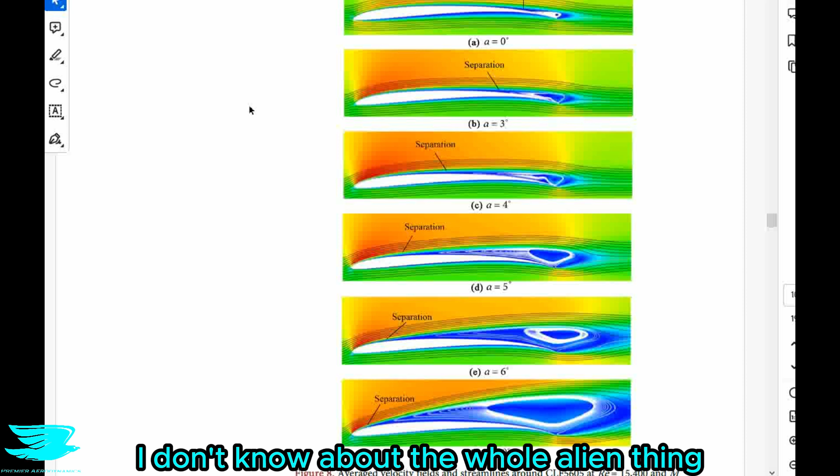The Mars helicopter Ingenuity was the first helicopter ever to not only fly around Mars, but also anywhere other than Earth. At least it was the first human-created aircraft. I don't know about the whole alien thing, but let's not get into that. The Mars Ingenuity is a helicopter that has been flying around on Mars for a few years, and it is unique in a few ways.

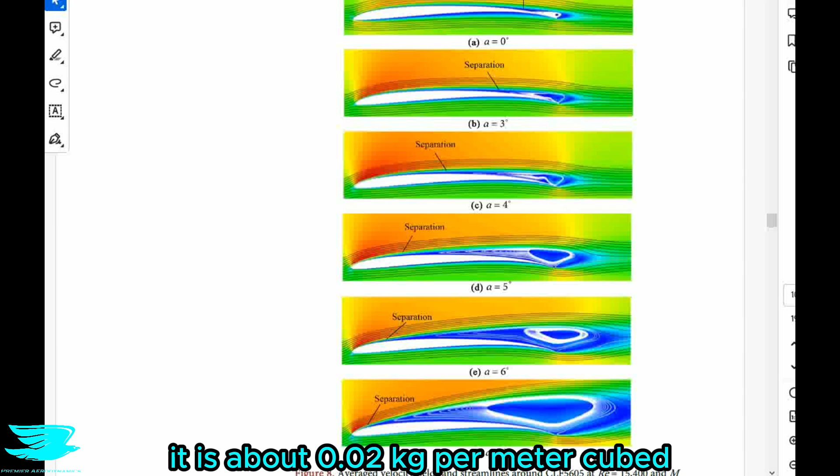The first way is that it is the first extraterrestrial aircraft to fly around. The second is that it operates in a very low density atmosphere. Because Mars' atmosphere is very thin, it is about 0.02 kilograms per meter cubed, which is 1/60th of Earth's. Now, with an atmosphere that thin, it results in a unique condition where you have these very low Reynolds numbers and compressible flows at the same time around these helicopter blades. Usually, compressible flows occur at higher Reynolds numbers.

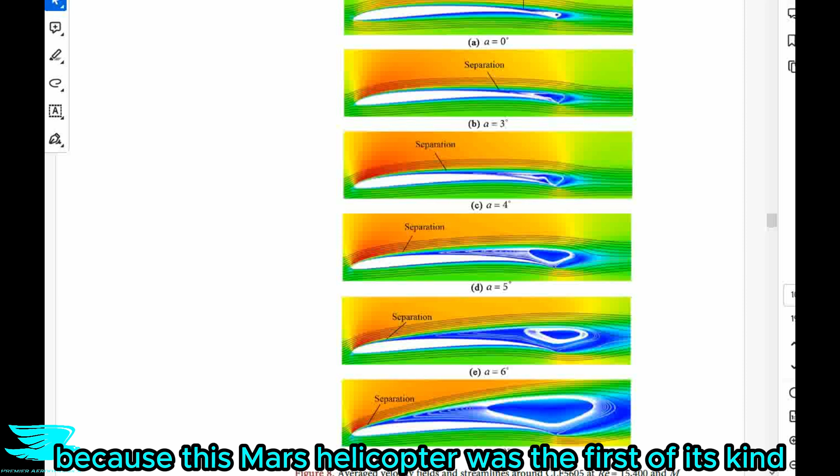So it is unclear how shockwaves form and their effects on the aircraft at such low densities. What's more, because this Mars helicopter was the first of its kind, its performance obviously won't be nearly as good as what we can make it, because we simply don't know how these low density shockwaves and general compressibility effects will affect the aerodynamics of the helicopter. As such, learning about these aspects will enable us to make far better helicopters for Mars and other planets too. For example, new aircraft will have better payloads or greater ranges or even higher speeds. Who knows, maybe even drag racing on Mars will be a thing in the future.

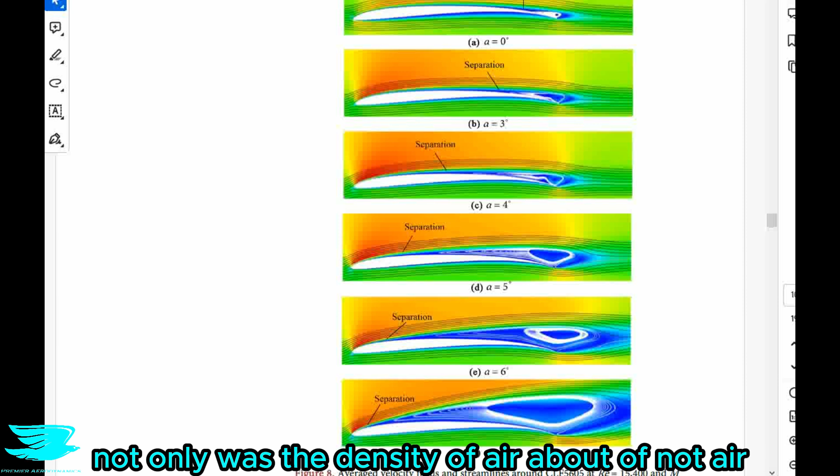Now, just to give you an idea about the conditions of Mars the helicopter had to face, not only was the density of air about 1/60th of Earth's, but the temperature was on average 223 Kelvin, so 50 degrees lower than freezing. And the speed of sound on Mars is only about 70% of that on Earth, because the atmosphere is mostly CO2 and is also much cooler. Also, the atmosphere's pressure is only 720 pascals compared to Earth's 101,000, so less than 1% of Earth's.

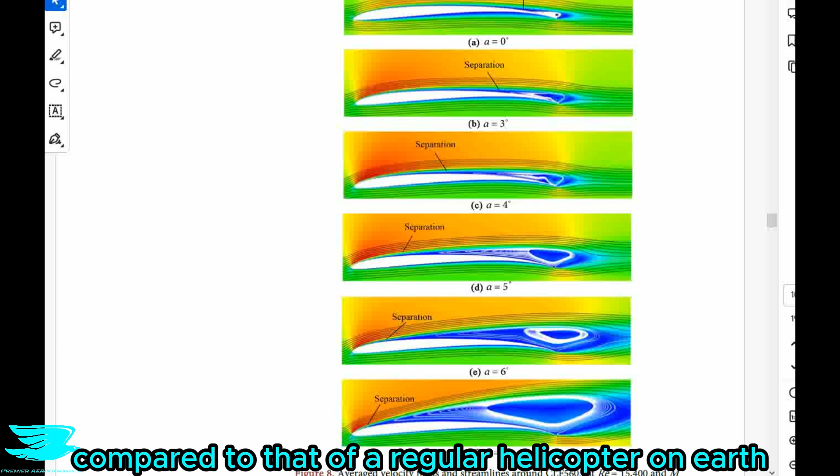As a result of all of that, the helicopter's rotor blades were only operating at a Reynolds number between about 1,000 and 10,000, comparing to that of a regular helicopter on Earth, where the blades are operating at a Reynolds number of about 1 million or even greater, so 1,000 times greater than that on Mars.

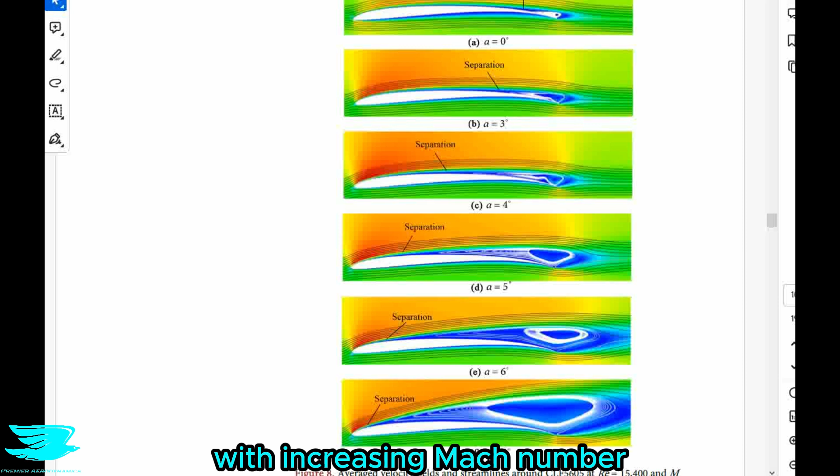So some studies on such low Reynolds number compressible flows reported that the wake becomes elongated and is delayed more. What's more, the lift coefficient can decrease with increasing Mach number. The study that reported that finding said that for their particular airfoil, the lift coefficient dropped because the compressibility effect delayed the transition to turbulence, and hence the laminar separation bubble that would form usually, it didn't form, and hence the lift coefficient dropped.

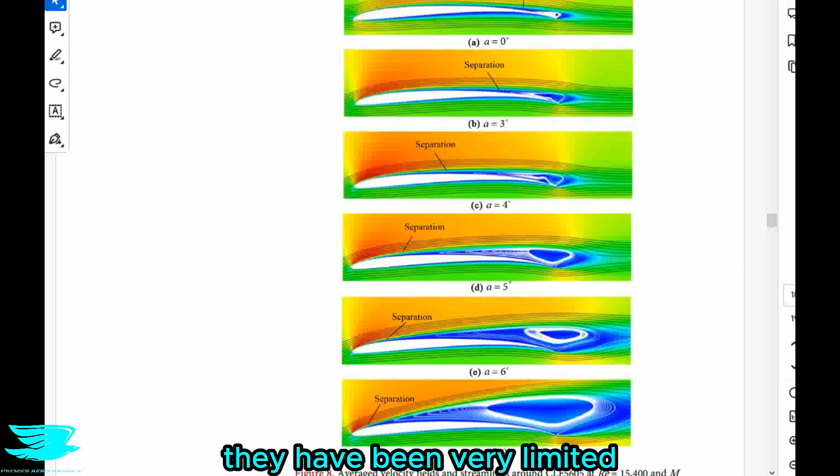Now, while other studies have shown some funky effects, they have been very limited to Mach numbers below 0.8. So the strange effects we are seeing here were found at relatively low Mach numbers and not even sonic speeds yet, which the helicopter on Mars is actually experiencing.

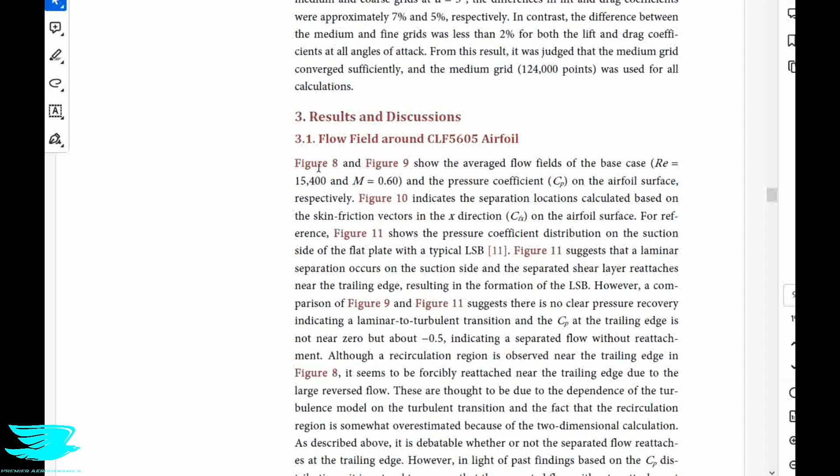So as a result, today we're looking at the effects of transonic speeds at these low Reynolds numbers on the Mars helicopter's blade profile. To do that, we're looking at a paper called Numerical Study on Low Reynolds Number Compressible Flows around Mars Helicopter Rotor Blade Airfoil. This is open access, so you can find it in the link below.

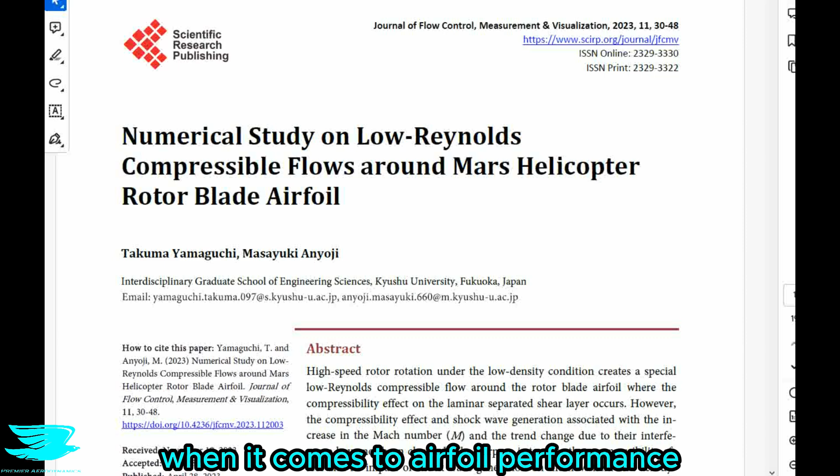Now, just a little more reason as to why the Reynolds number is so important here when it comes to airfoil performance. In figure 2, we see the effects of the Reynolds number on the maximum lift-to-drag ratio of an airfoil in general terms. We see that for the laminar boundary layer, this region of the plot here, the maximum lift-to-drag ratio is far lower than when you have a turbulent boundary layer. And then when you transition from laminar to turbulence, there's this massive peak. It spikes up to a much higher value, and then you go to turbulence.

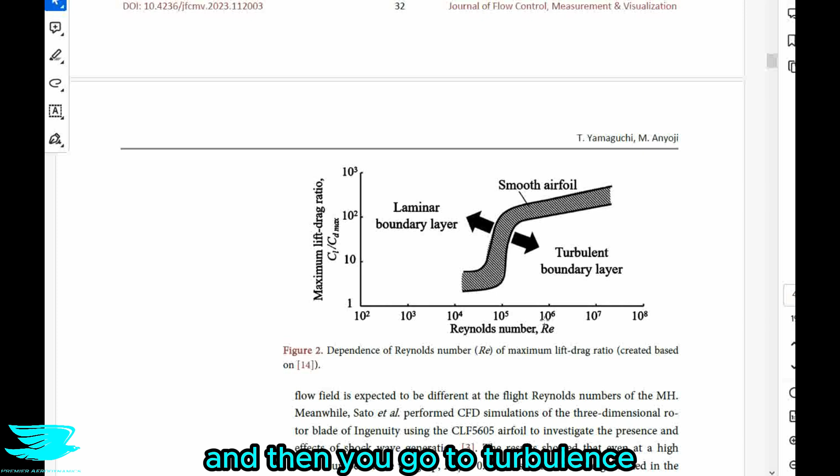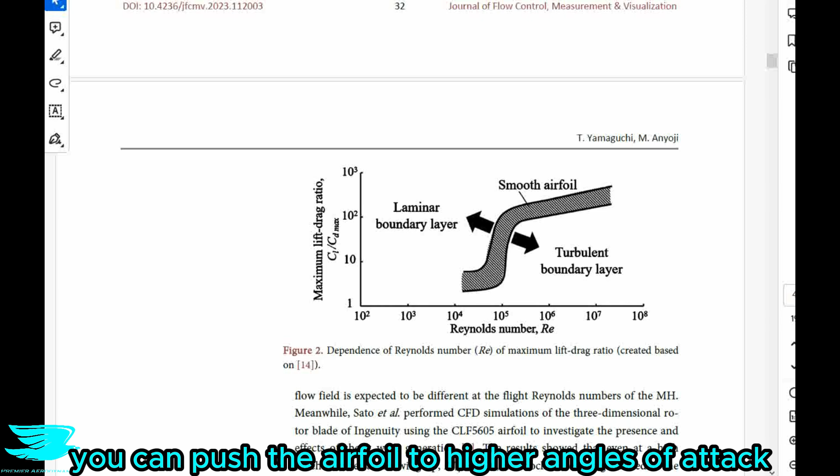So one major reason for that is that at higher Reynolds numbers, the flow over the airfoil has much more energy to stay attached. As such, you can push the airfoil to higher angles of attack and still have the flow attached, and hence you get more lift. And that also reduces the drag coefficient. You also get a smaller wake and lower pressure drag.

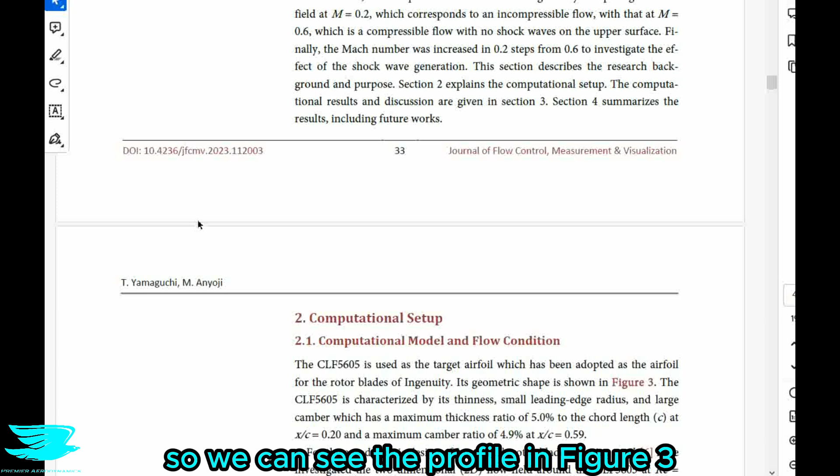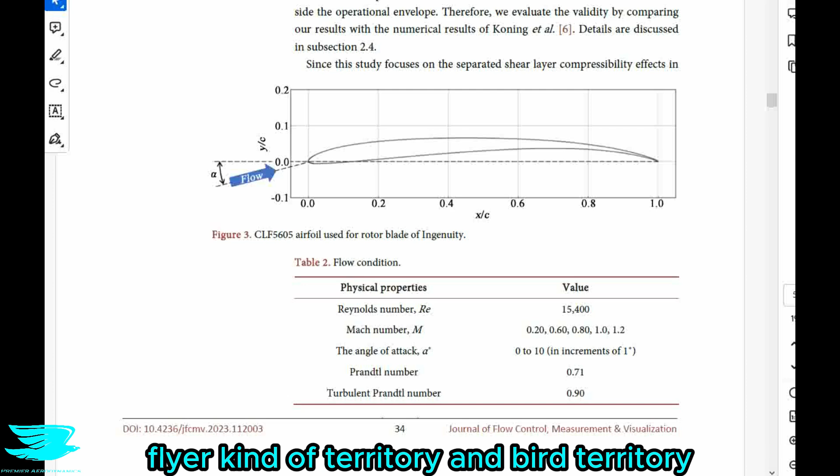So we can see the profile in figure 3 if we go down here. The profile is designated a CLF 5605. Now, going from the blade root to the blade tip, the profile did change a little, but overall the blade profile was still very thin. It had a thickness to chord ratio of only about 5%, which is quite thin. That's getting to like Wright Brothers Flyer kind of territory and bird territory, which is very thin. And this maximum thickness occurred at 20% of the chord, which is pretty common.

Now, it was a little cambered with a camber ratio of 4.9% occurring at 59% of the chord from the leading edge. That is really far back. For a typical cambered airfoil, the maximum camber occurs at around 30% to 40% of the chord from the leading edge. For this airfoil, the maximum occurs well past halfway.

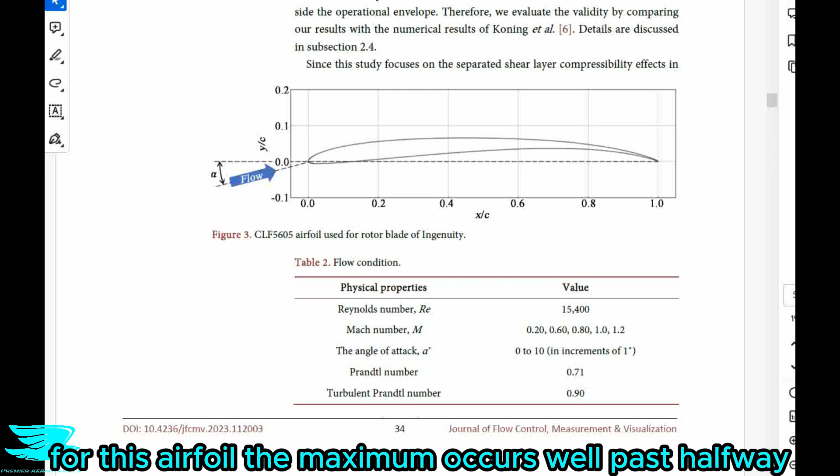So for the helicopter, the diameter of the blades was 1.2 meters, so a pretty decent size.

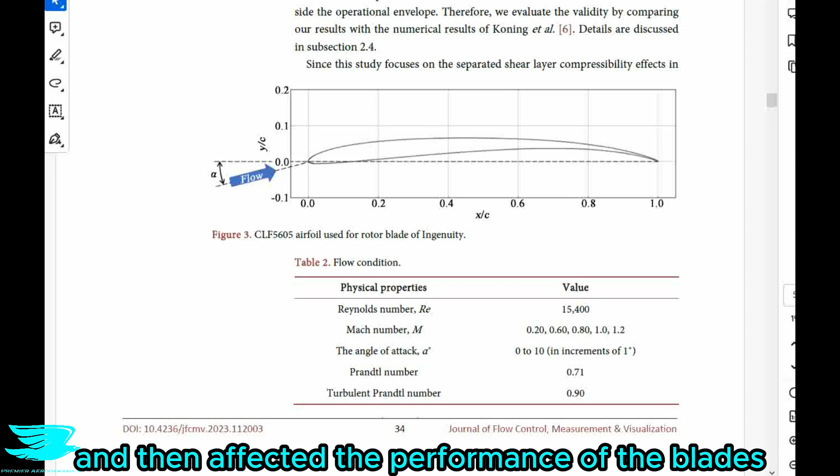So to find out the effects of transonic speeds at low Reynolds numbers on this airfoil profile, these researchers did CFD. They went through a bunch of Mach numbers to see how the shock waves formed and affected the performance of the blades. To begin with, they ran their CFD at a Mach number of 0.6, which only corresponds to a Reynolds number of 15,400, and that is for like a person-sized helicopter. That's really low. Usually it should be close to a million or so.

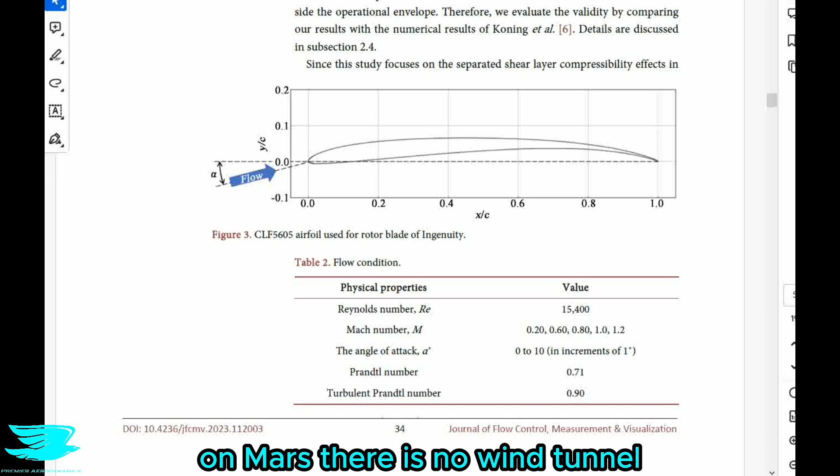They said they selected this Reynolds number because there is other CFD validation data to compare it to. The reason they have to settle for other CFD data to validate their CFD is because these unique conditions on Mars cannot be replicated by any wind tunnel on Earth. There is a wind tunnel designed to replicate Mars conditions, aptly named the Mars Wind Tunnel, but even that cannot replicate these specific conditions.

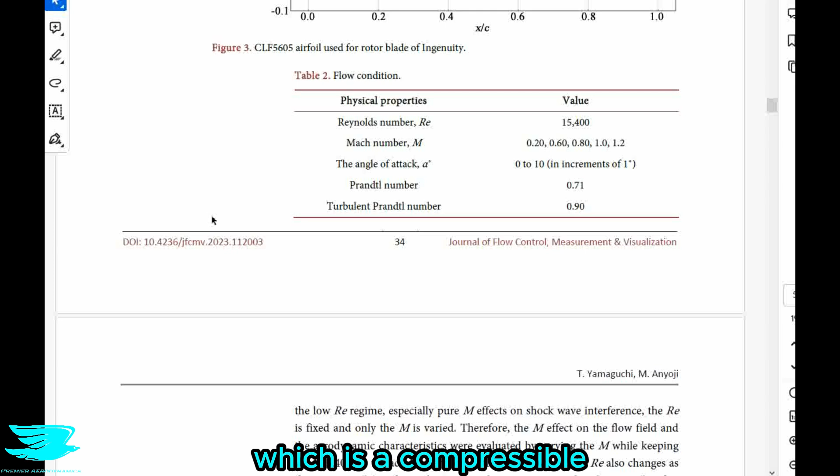So that's pretty amazing. For their CFD code, they're using one called FaSTAR, which is a compressible solver developed by JAXA, the Japanese Space Agency. In table 3, if we come down here, we see some additional information about their CFD solver and their settings.

So one thing that is interesting to me is that they use the gamma theta SST turbulence model. They say they use this turbulence model effectively because it is capable of modeling laminar separation bubbles.

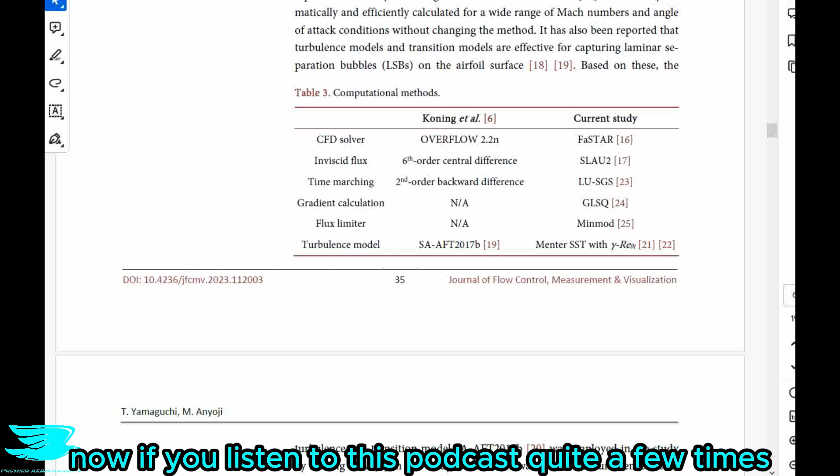Now, if you've listened to this podcast quite a few times, you know I often talk about laminar separation bubbles, and you might be getting bored of hearing about them. If so, then I get it. Believe me, I get it. I spent several years investigating these things and how to model them in CFD. And when I got to the end of that period, I was so over them. It was a frustrating period because it was early in my aerodynamics career and I wasn't that knowledgeable about these bubbles. And they're also a little complex to understand and model. So it was kind of like nature's strength versus my weakness at the time.

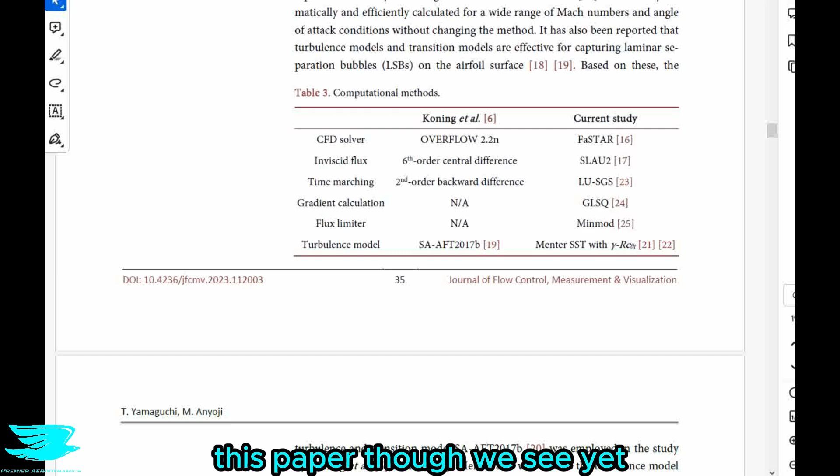Anyway, this paper though, we see yet again them popping up. So that goes to show you just how widespread they are and hence how important they are to understand.

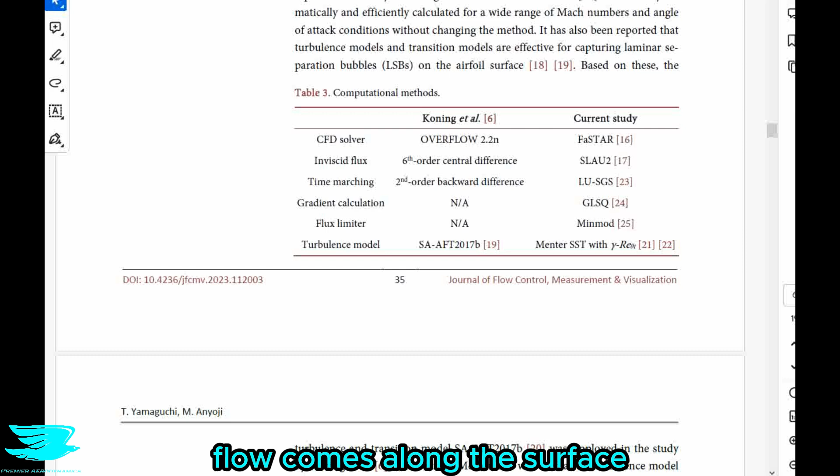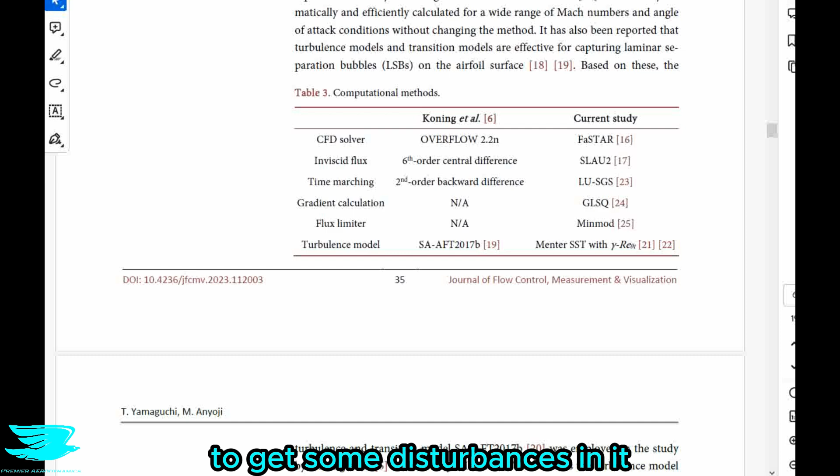So for those of you who don't know what a laminar separation bubble is: it occurs when you get a transitional Reynolds number, and it is a way for the boundary layer to transition to turbulence. What happens is that the flow comes along the surface, not necessarily an airfoil, but just the surface, and the adverse pressure gradient from the airfoil does help. As the flow goes over it, when the boundary layer is starting to get some disturbances in it, it then detaches from the surface, transitions to turbulence, and then reattaches. In this separation zone, we get a recirculation region, which is the bubble.

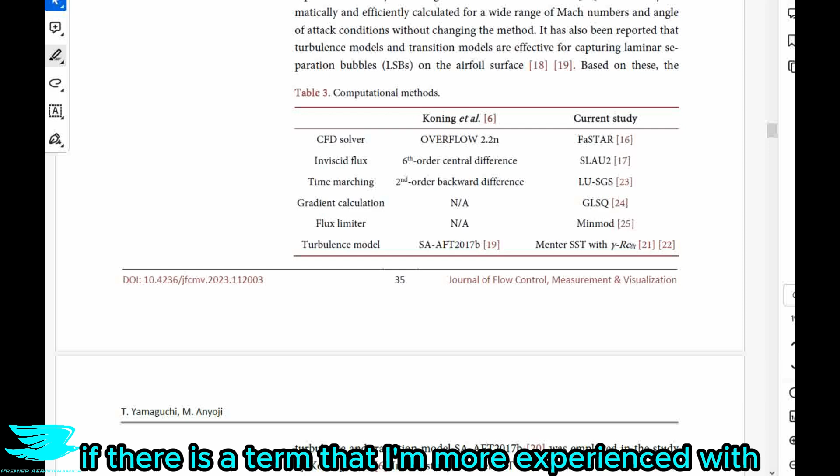And actually, one thing I should mention is that I have noticed when doing these podcasts, if there is a term that I'm more experienced with, for example laminar separation bubble, I say it even faster than normal. So for example, last week when I was talking about vortex generators, I wasn't pronouncing the term properly. And that's because I've said the term so many times that now I just try to say it as fast as possible so I can get on with the rest of the sentence. So I'm definitely trying to slow down when I'm saying these terms. But if you hear me saying something like a slack jaw, then you know why.

So in this podcast, I'm going to be calling laminar separation bubbles LSBs. Anyway, back to the turbulence model they used, the gamma theta SST.

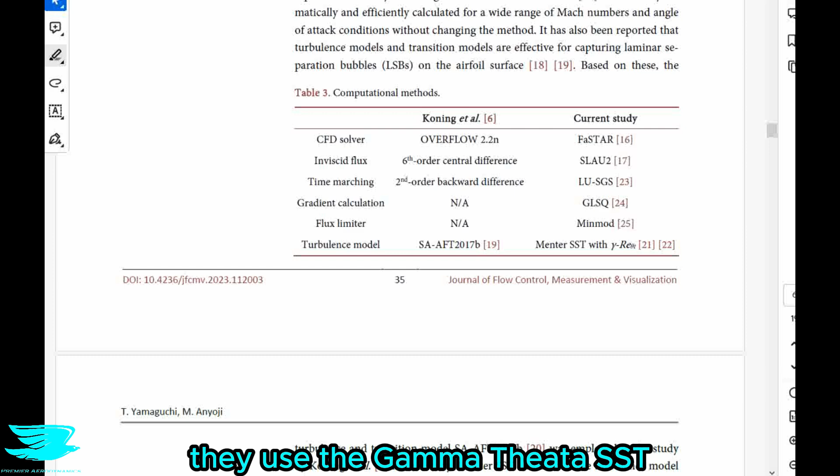So in my experience, it is a decent model for predicting LSBs, but it isn't the best model. The model that I have had the most success with is the K Omega SST one. So I'm quite interested to see how this turbulence model goes in the validation process, again just with other CFD, but it will still be quite interesting to see.

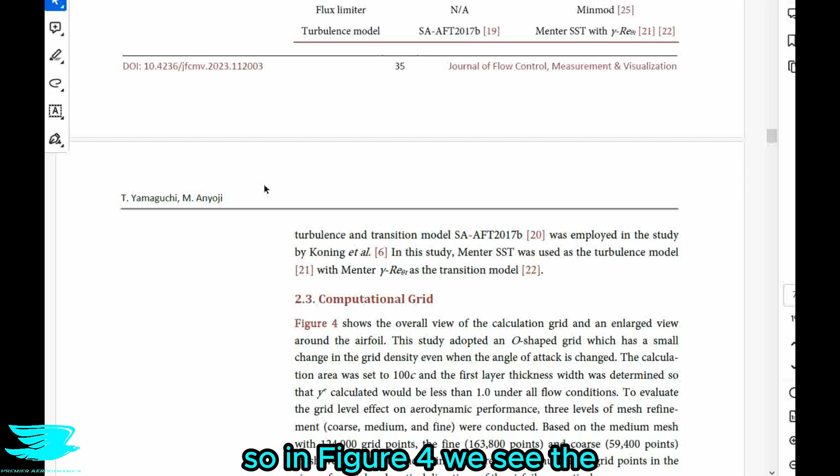So in figure 4, we see the domain of their 2D simulation. Let me zoom in a bit here. So we have an O grid for the domain, which is literally just a circular domain, and we don't really see that often. The airfoil is then placed smack dab in the middle.

And they say that they used this type of grid because it doesn't really change the grid density when you change the angle of attack. That's really smart. So what this means is that pretty much regardless of the angle the flow is coming in at, the mesh the flow sees will be the same. There is no directionality to it. That means that the results will be more consistent.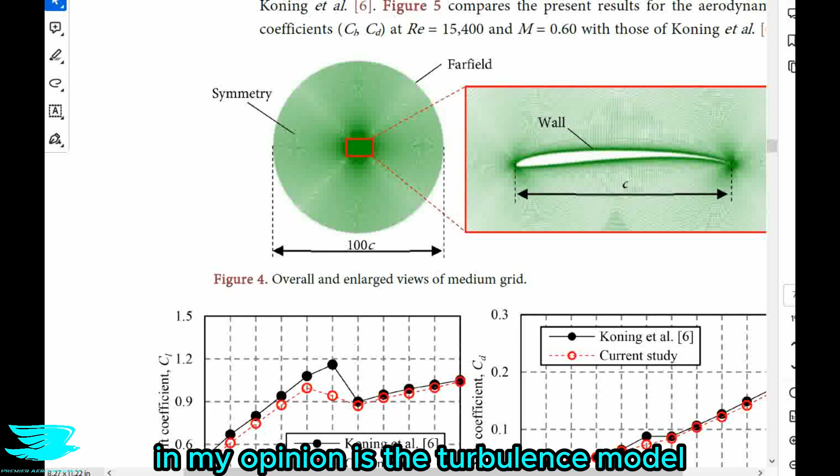Now, I should mention that this is a very specific and advanced thing to think about, and most CFD simulations wouldn't really benefit that much from doing this, because the thing that most CFD simulations could benefit from the most is really just improving their mesh in general, their quality. The second thing that they would benefit most from, in my opinion, is the turbulence model, which also ties in very closely to the mesh as well.

So they say that the Y plus is under 1 for all flow conditions, which is good.

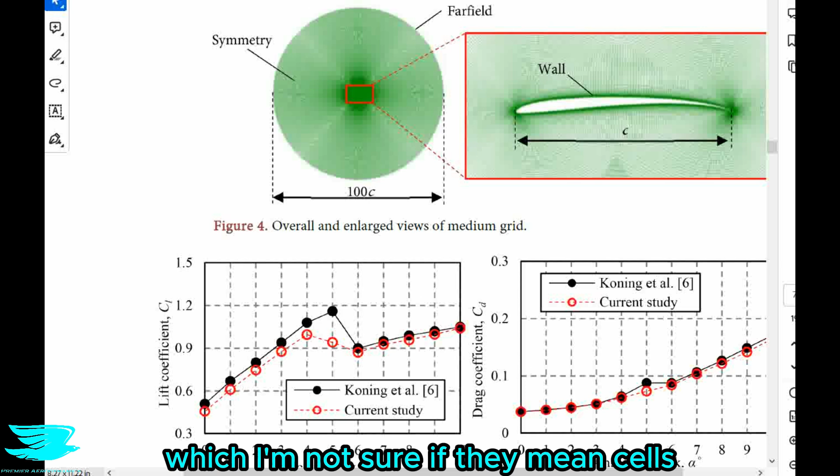But with this CFD, the authors tested 3 different meshes to see how many cells they needed to use. Their coarsest mesh had 59,400 points, which I'm not sure if they mean cells or really just points, like nodes. If they're related, it's not really a big deal here, but still, it's just a point. So the medium mesh fineness was 124,000 points, and the finest mesh was 163,000 points.

And I would like to see that number for the finest mesh bumped up a little bit, because at the moment it is just a 30% increase, and that's probably not enough to really see the grid converging in results.

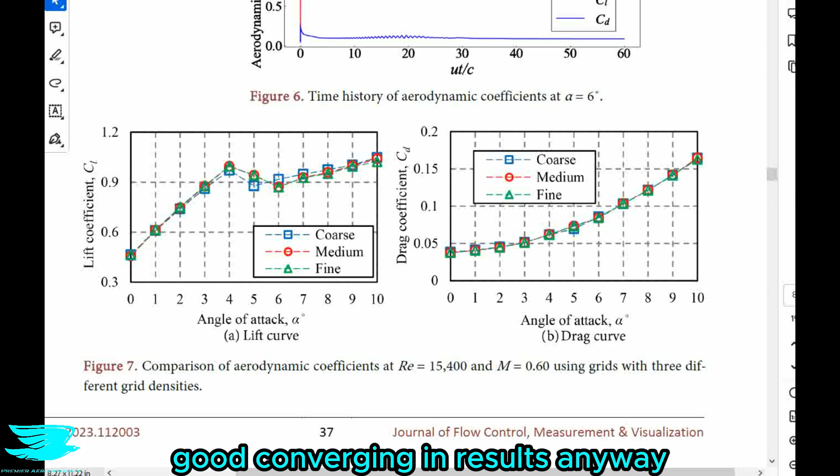Anyway, in figure 7, they show how these different meshes affected the lift and drag coefficients across the range of angles of attack that they're interested in. And I must say that I'm pretty impressed with what they did here, because for a lot of mesh independence studies, the researchers usually just select 1 or 2 angles of attack and base the decision on that. In this mesh independence study, they used 11 different angles of attack, and it is quite thorough here. So they went to a lot of effort to do this.

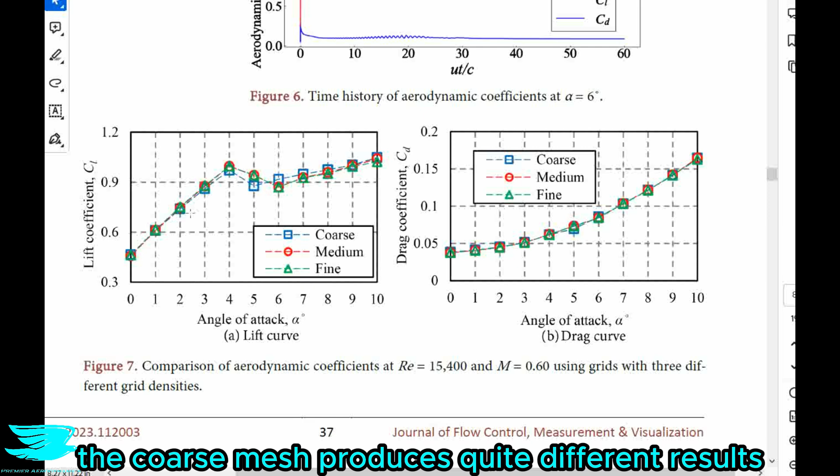For the drag coefficient in this right plot here, each mesh produces almost identical values across the range of angles of attack. There's just one little hiccup at about 5 degrees for the coarse mesh, but everything else is really nice and consistent. For the lift coefficient, which is the left plot here, the coarse mesh produces quite different results across the angle of attack range.

So the medium and fine meshes are much closer together. So the medium mesh looks good from this study to go with, whereas the coarse mesh is probably not as good.

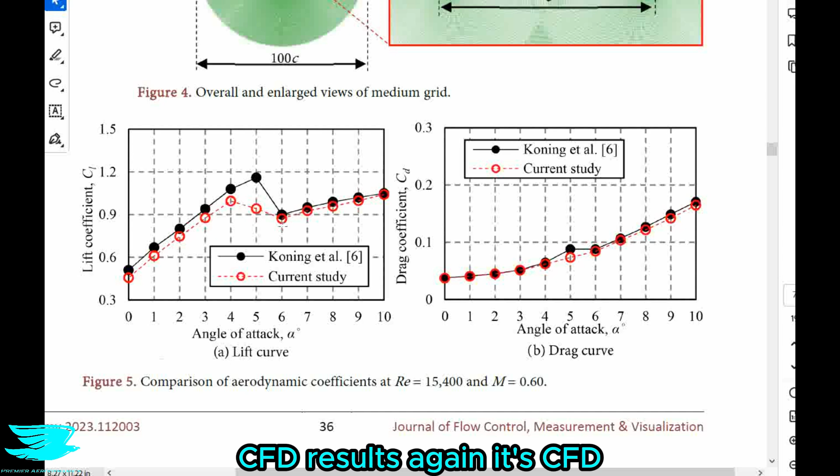In terms of actually validating this model, in figure 5, we see the results from this CFD compared with the literature CFD results. Again, it's CFD, not experiments. For the drag coefficient, which is the plot on the right, the CFD here lines up very closely with the literature. For the lift coefficient, it isn't as close, particularly at lower angles of attack.

So this CFD underpredicts the lift coefficient by about 50 counts between 0 degrees and 4 degrees. And this underprediction is consistent, which I find a little odd in this range. This means that there probably is a systematic error that's causing this 50 count difference.

And I'm not sure what is causing that, but the researchers say that it is likely due to the different turbulence models they use between this study and the one from the literature. So the LSB and separation in general is apparently occurring earlier in this CFD than what's being shown in literature. So that's how the turbulence models can affect the results. And without experimental data, it is difficult to tell then which CFD is correct.

The authors say that it is the fault of this particular gamma theta turbulence model, and I agree to some extent that this turbulence model isn't perfect, but it may not just be this CFD that is off. Perhaps the literature CFD is also off.

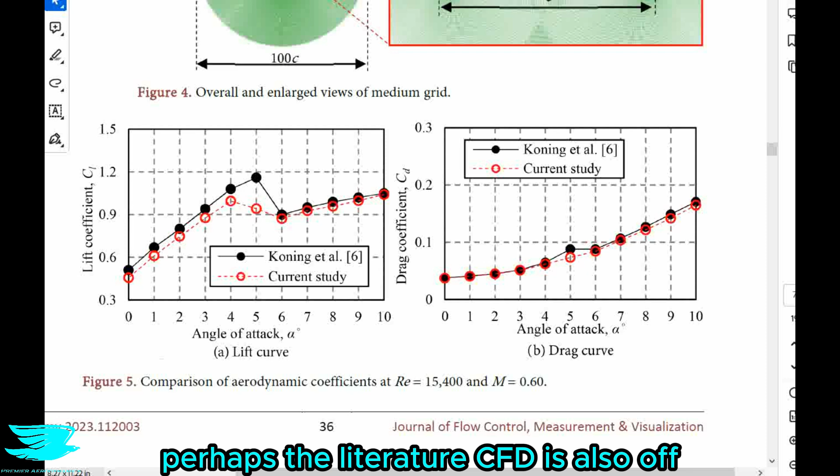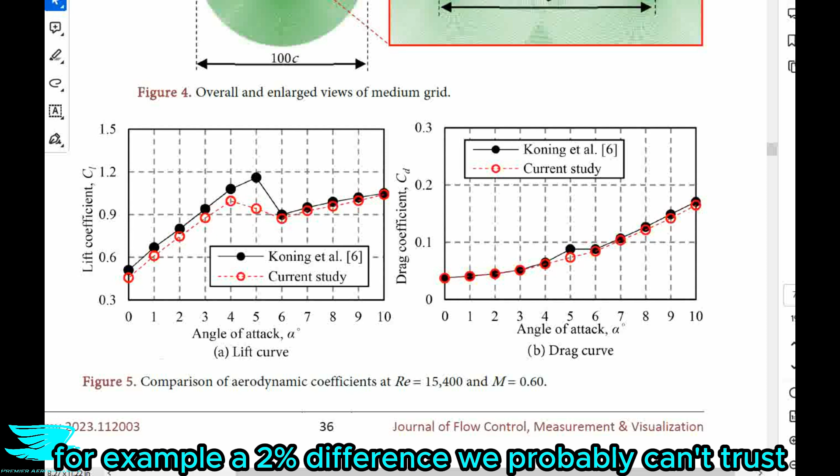From all of this, I would say that we can trust the general trends. As for the exact values, for example a 2% difference, we probably can't trust. So overall, I'd say that this CFD is probably a 7 out of 10.

So with all that, let's move on to the results.

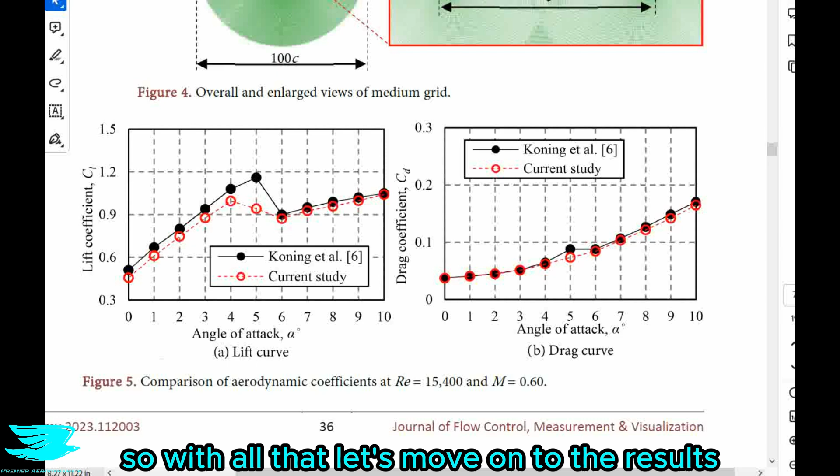Now, in figure 8, we see an incredibly weird LSB forming. This is for a Mach number of 0.6 and a Reynolds number of 15,400. So to begin with, at low angles of attack, the LSB looks pretty normal.

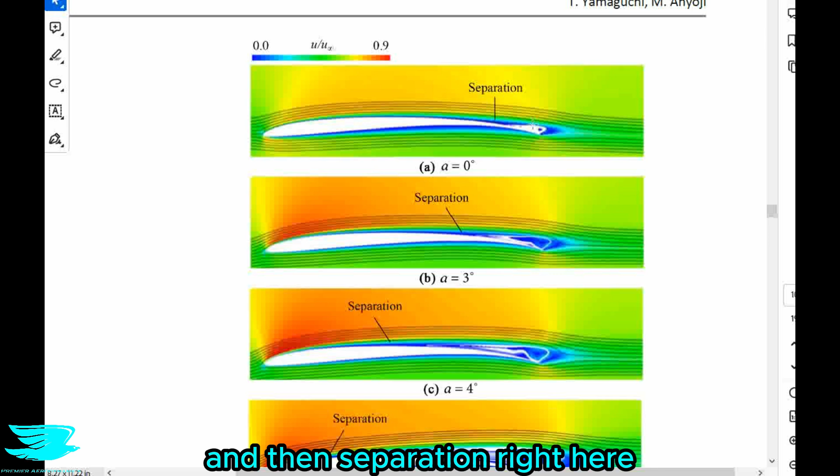It forms near the trailing edge. So back here, we can see the streamlines coming over, and then there's a separation zone here, with all these little white streamlines just circulating around. That's the LSB.

This effectively increases the camber back there and would likely increase the lift produced compared to if there wasn't an LSB. But as we get to high angles of attack, and especially at the highest one simulated, which is 9 degrees, the LSB is not only huge, but also extends well past the trailing edge.

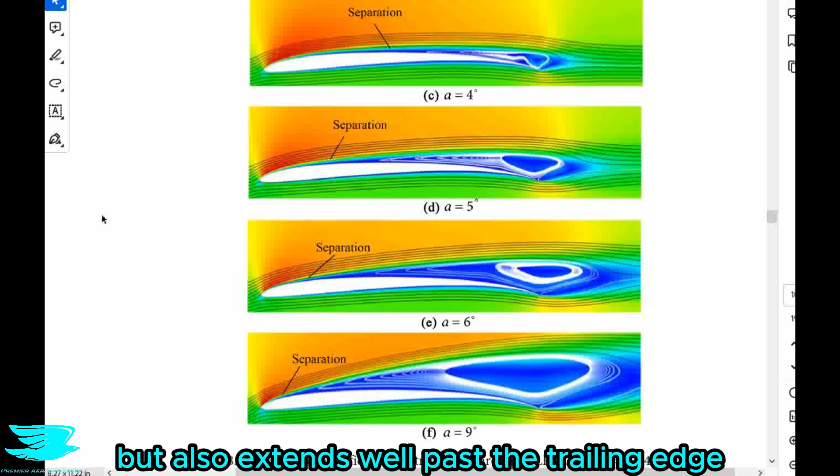The trailing edge is here, and it's ending all the way back here. And then it bends back and reattaches to the trailing edge. It's really weird. I've never seen an LSB extend past the trailing edge like this, especially not like 30% past the chord.

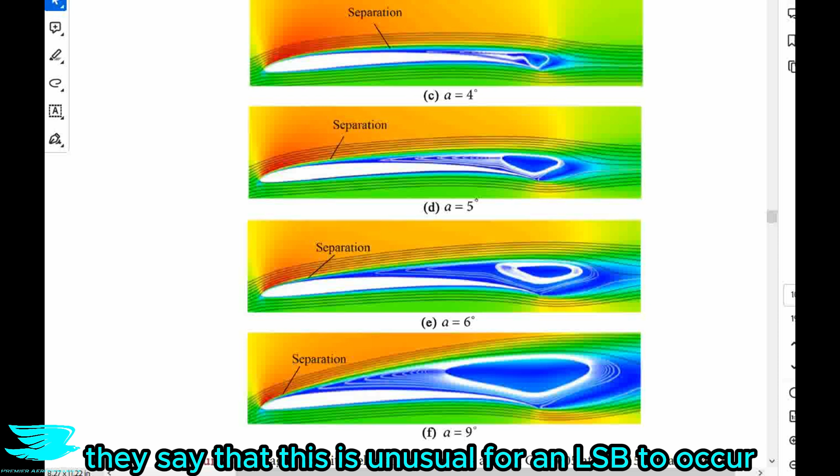So the authors say that this is weird as well, and although not in so many words, I guess, they say that this is unusual for an LSB to occur, and it's probably an error due to the gamma theta SST turbulence model that is causing it.

I would agree to some extent that this is probably an error, and probably the turbulence model is partly causing it. Could you imagine if there was an LSB that looked like this? You'd have it extending past the airfoil, effectively increasing the chord and the surface area. Effectively, you have this bubble in the wake, and it could even produce lift.

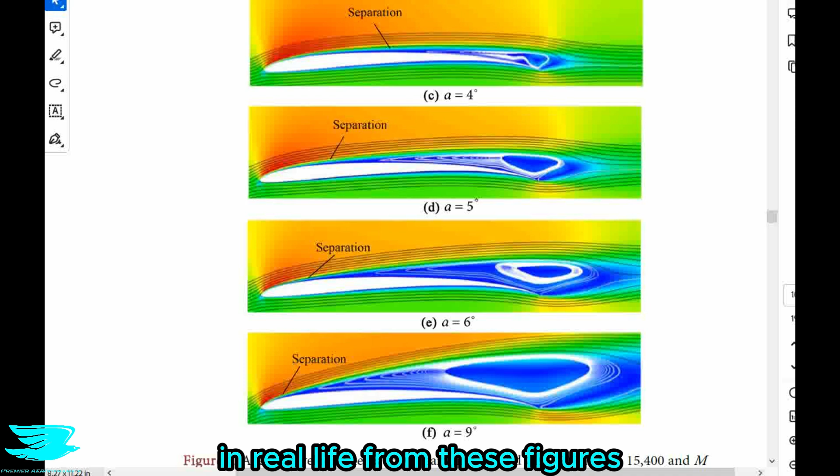So I don't know how this is really possible to occur in real life. From these figures, I don't think we can really trust them past 4 degrees, because after that, the LSB starts to become really weird and strange, not really resembling real life, I think.

So I'm going to downgrade what I said before about this CFD and rate it more at a 6 out of 10. Anyway, apart from that oddity, one trend that makes a lot of sense is that as the angle of attack increases, the LSB starts to form closer and closer to the leading edge.

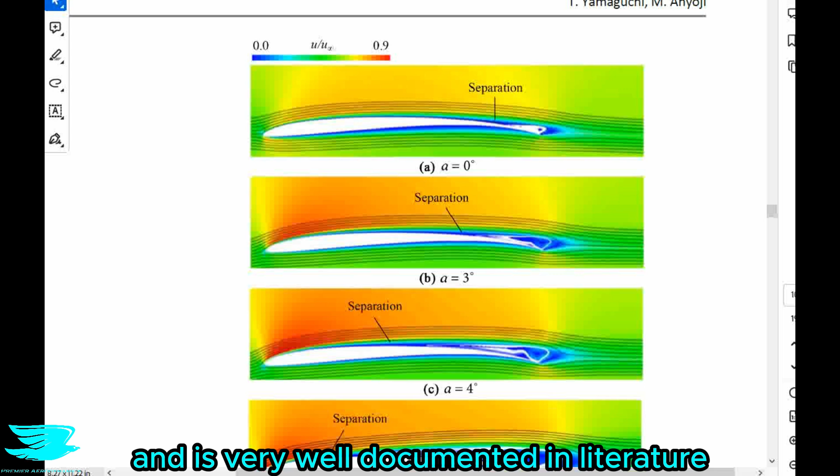It marches forward. That definitely does happen and is very well documented in literature. Now let's move on to the effects of compressibility on this airfoil's performance.

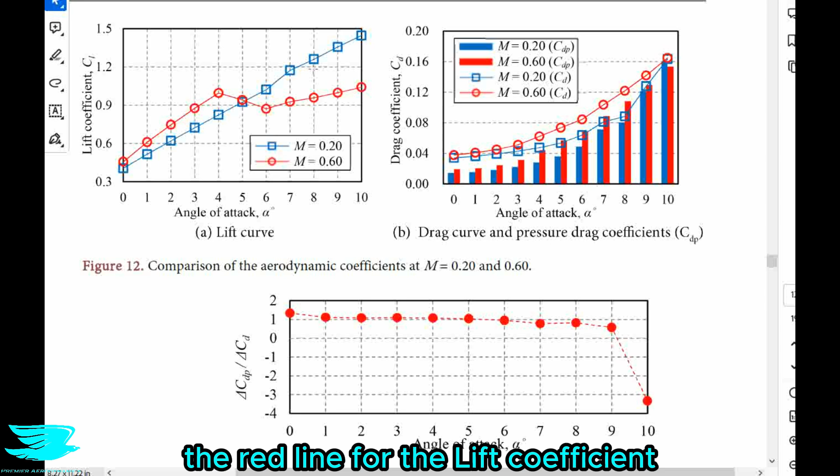So in figure 12, if I scroll down here, we see the effects of going from a Mach number of 0.2, the blue line, to a Mach number of 0.6, the red line, for the lift coefficient and the drag coefficient, and also the pressure drag coefficient, which is really cool. We rarely get to see the effects of different components on drag, like the pressure drag and the skin friction drag.

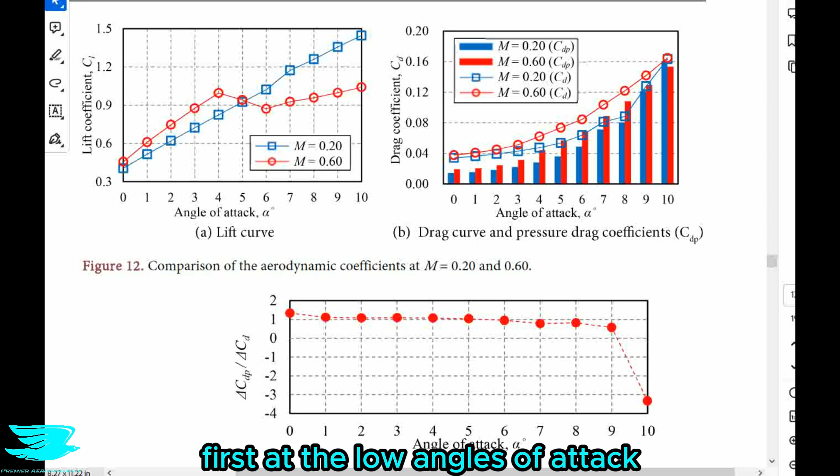Interestingly, when the Mach number increases from 0.2 to 0.6, the lift coefficient plot was greatly affected. First, at the low angle of attack, the lift coefficient was much higher, by about 20%.

And then secondly, at 4 degrees, the stall occurred for this higher Mach number, which is quite strange, given that at 0.2 Mach number, the lift coefficient was much more typical, where it just steadily increased with the angle of attack and didn't stall until past what they tested at.

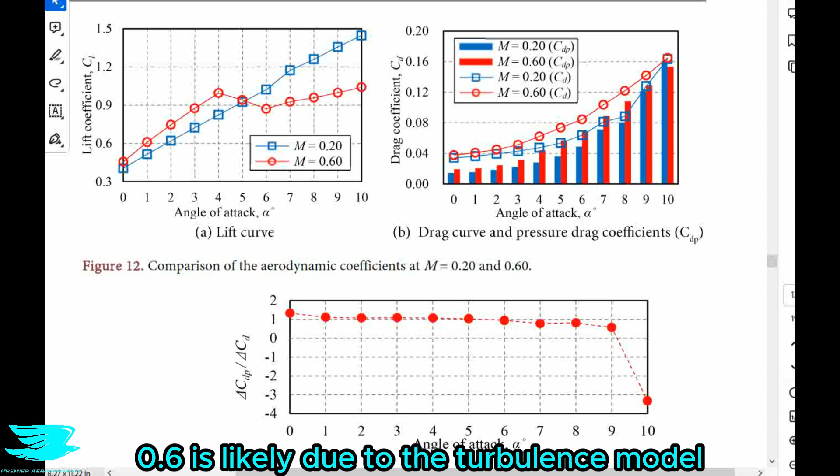So this early stall at Mach 0.6 is likely due to the turbulence model we mentioned earlier. So I'm not sure how accurate above 4 degrees is. Let's just focus on these lower angles of attack for this podcast.

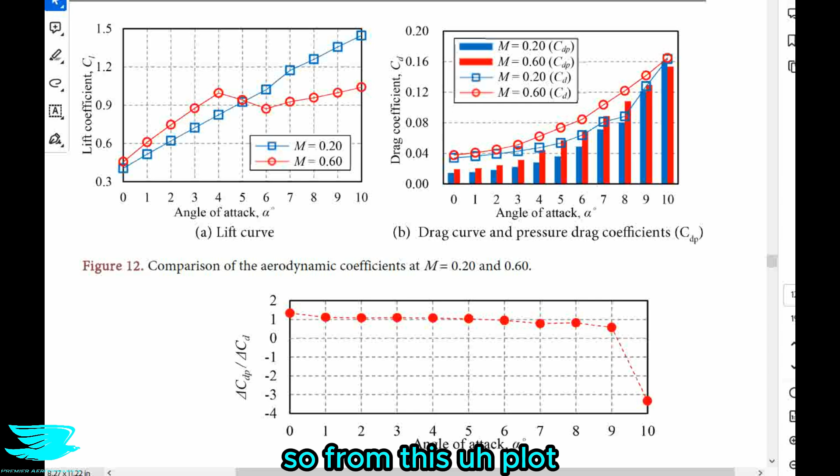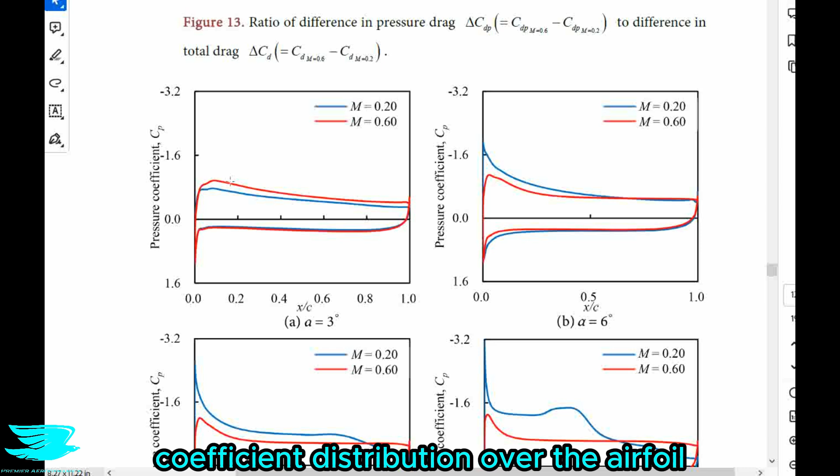So from this plot, it is clear that the greater the Mach number is, that definitely increased the lift coefficient, and that's very beneficial. The authors don't really go into why this occurs, but from figure 14, if we scroll down to these figures showing the pressure coefficient distribution over the airfoil, we see that at 3 degrees, the suction surface just has a low pressure coefficient over the entire thing, really.

So the flow accelerates over the suction surface perhaps a little bit more, which then results in a lower pressure and then a greater lift being produced.

In figure 12b, we see that with increasing lift coefficient, the drag coefficient also increases at higher Mach numbers. This increase in the drag coefficient comes about pretty much completely because of an increased pressure drag, which indicates a larger wake, probably due to the LSB, I would say.

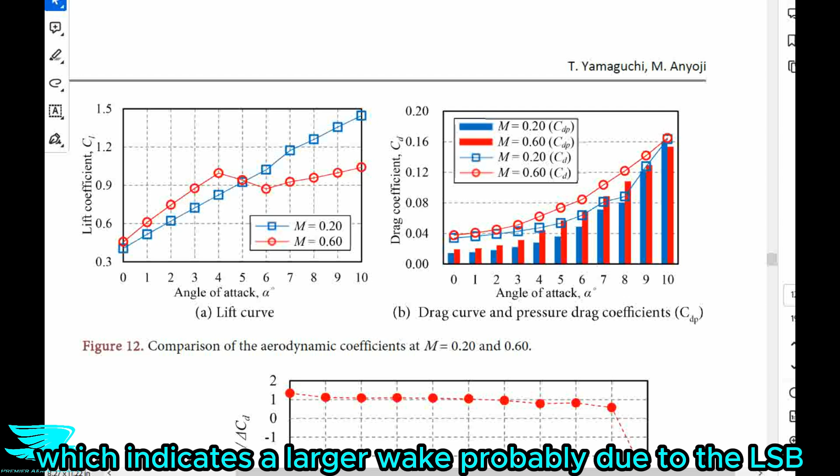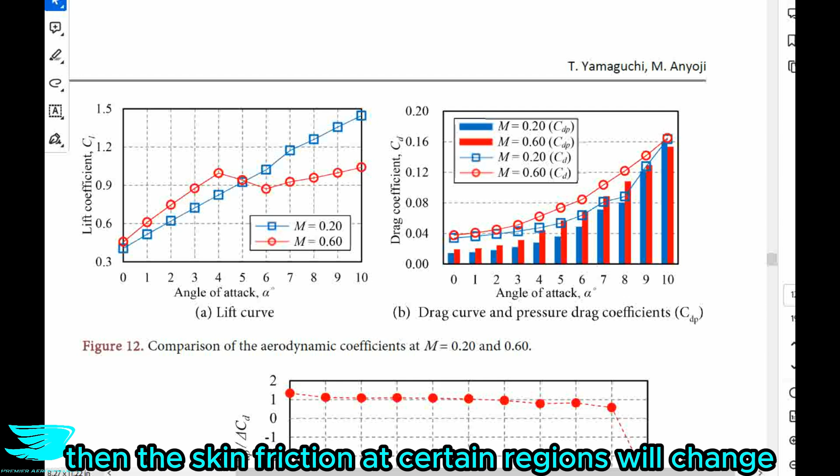With that, we can also conclude that the overall skin friction drag isn't really affected too much by the Mach number increase either, but that doesn't mean the skin friction drag stayed constant with the Mach number. What I mean is that if the Mach number changes the LSB, which is logical, then the skin friction at certain regions will change because the near wall velocity is different.

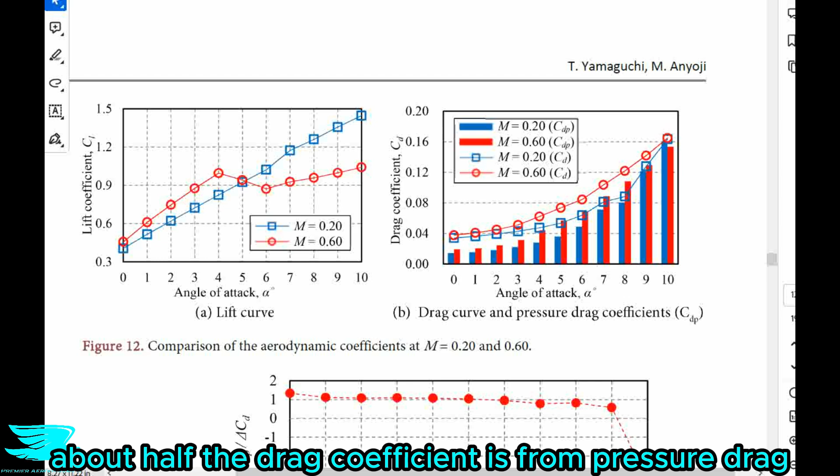So what that means is that all these changes really just cancelled out, and at least that's what this plot is indicating, because most of these changes are from the pressure drag and not from the skin friction drag. So from what I can tell, about half of the drag coefficient is from the pressure drag and half from the skin friction drag.

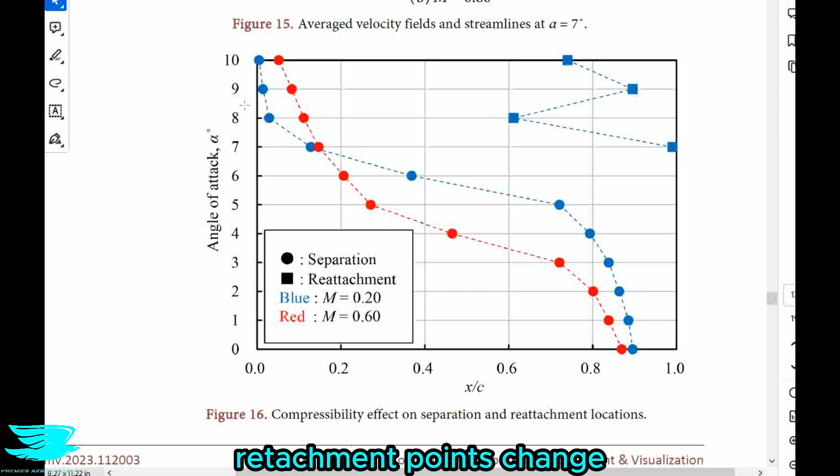So what this plot is showing is where the flow is separating over the airfoil at 2 different Mach numbers, Mach 0.2, which is the blue line, and Mach 0.6, which is the red line. The y-axis is the angle of attack, so we see how the separation and reattachment points change with angle of attack. With that, we can then tell how big the LSB is.

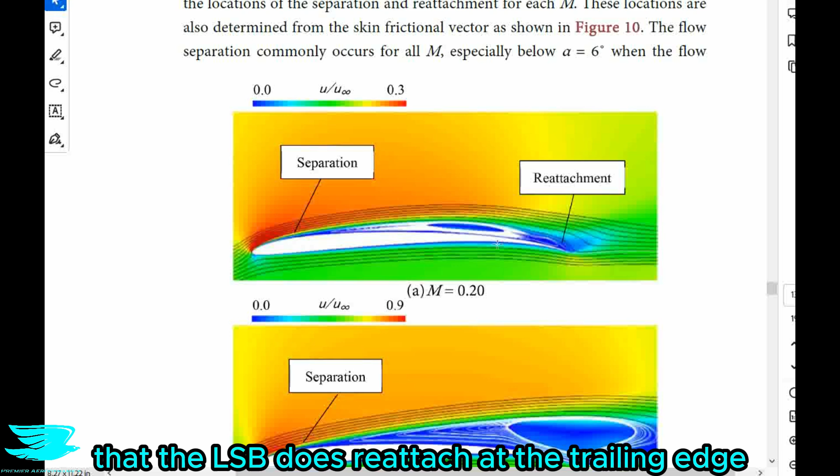So the red line is for Mach 0.6, and we see that there is no reattachment point plotted on this graph. I think that's just an omission, because we saw in figure 15, for example, that the LSB does reattach at the trailing edge, even at low angles of attack. At high angles of attack it didn't make sense, but at low angles of attack it does.

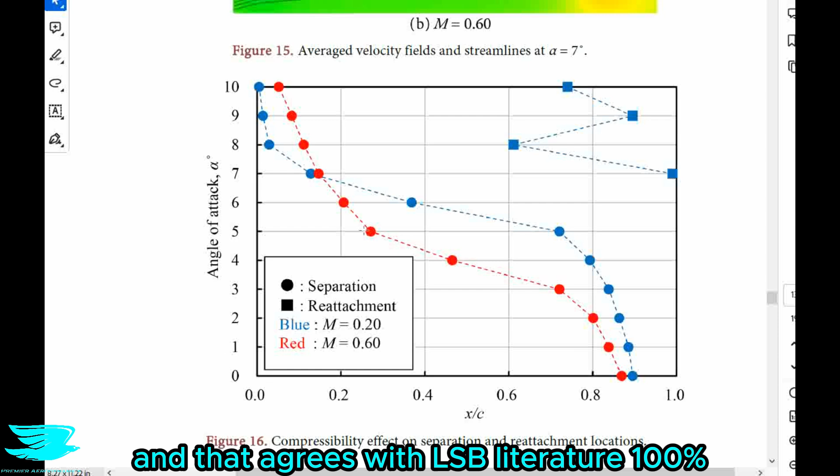So the general trend we see is that for both Mach numbers, as the angle of attack increases, the point at which the flow separates marches towards the leading edge, and that agrees with LSB literature 100%. Now all of this is just fairly subsonic flow. What about transonic flow? Because we know the Mars Ingenuity is flying around and the blades are experiencing transonic speeds. Let's move on to those results now, because this is what we've been looking forward to.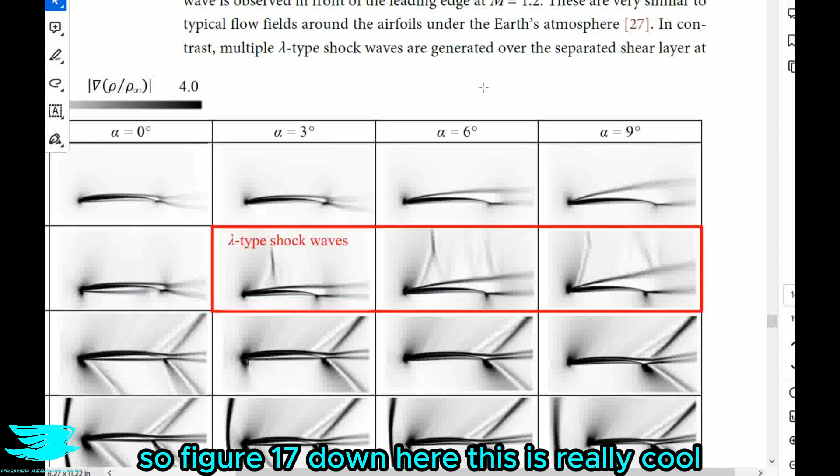Okay, so we see really cool shockwave patterns around the airfoil, and I actually recently covered the general shockwave pattern around a double wedge airfoil on YouTube, on our channel. If you're interested, it's called Supersonic Double Wedge Airfoil Aerodynamics, Aero Fundamentals number 50.

So one thing to note here is that we are seeing the density changes around the airfoil, which is not necessarily the shocks, but at transonic and supersonic speeds, they are.

So let's first cover the subsonic cases, this top row here at Mach 0.6, to get that out of the way. These figures clearly show the LSB forming on the airfoil. In fact, I've never seen the LSB visualized like this in CFD, and I really like it. It's very effective and clear. Without all the other stuff you see, like the streamlines, this pertinent information just really pops. It's very easy and clear to see.

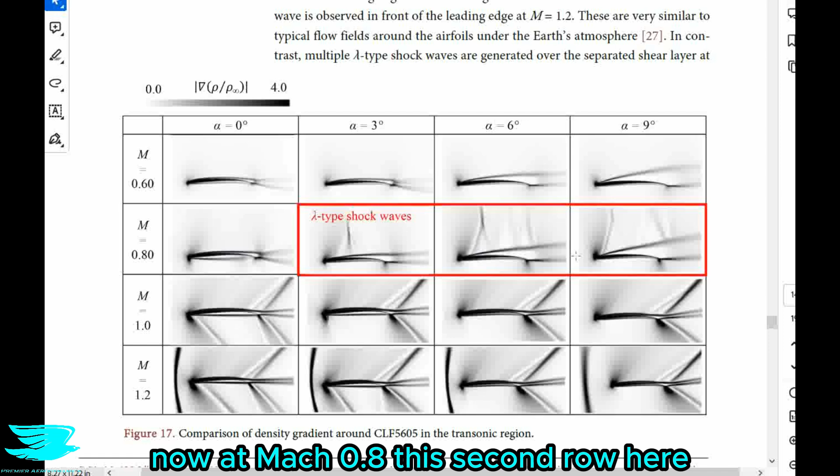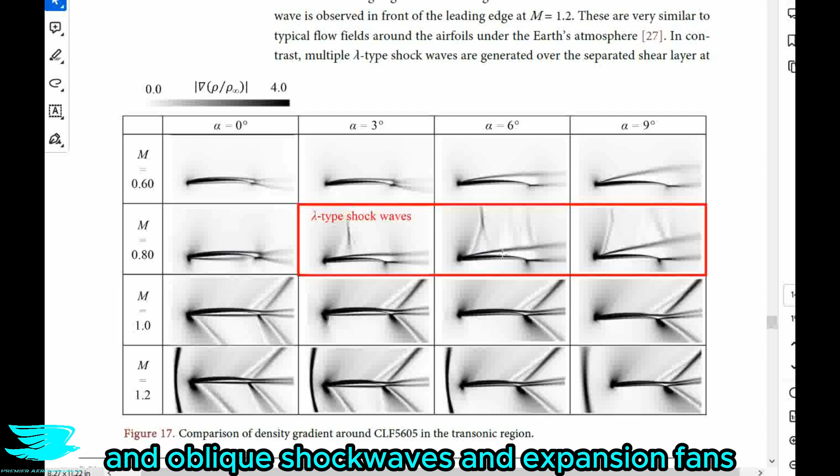Now at Mach 0.8, this second row here, we start to see what is called a lambda type shockwave forming. These are different to normal shockwaves and oblique shockwaves and expansion fans. What is happening is these lambda shockwaves, as they come down, it's like a lambda symbol, the Greek letter. As the flow accelerates over the airfoil, it hits the critical Mach number, then we get a shock forming.

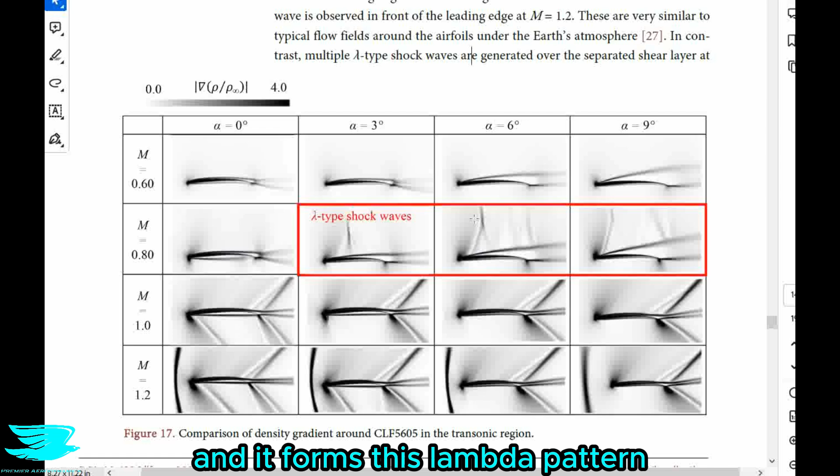And then we will get an LSB forming here. Once the LSB starts to curve back down, it then stretches the streamlines, and that results in another shockwave forming, but now at a different angle. That shockwave comes up and intersects the original shockwave at some point, and it forms this lambda pattern. So that is what we see here. And as the angle of attack increases, the shockwave moves forward towards the leading edge.

This is logical because as the angle of attack increases, the point at which the flow accelerates to sonic speed gets closer and closer to the leading edge. So we're hitting the critical Mach number sooner.

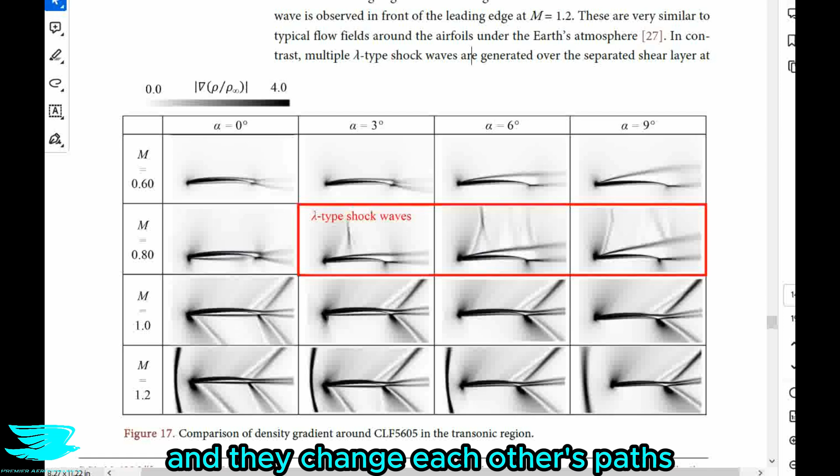Now at higher Mach numbers, for example Mach 1, shown in the next row, we don't see the lambda shock anymore. We get a regular diamond pattern shockwave forming, because we start getting an oblique shockwave at the start of the airfoil, meaning the flow over the rest of the airfoil is already supersonic and no more shocks occur until the trailing edge. That's where the flow on the upper surface meets the flow on the lower surface, and they change each other's paths, leading to further compression and hence shocks, which is why we get these two shockwaves at the trailing edge fanning out.

Now at Mach 1.2, we get a shockwave standing off the leading edge, which occurs because of extreme compression ahead of the airfoil. We also get the rest of the familiar shocks over the rest of the airfoil, so this pattern at the back of the trailing edge.

So what effect do these shocks and higher Mach numbers have on the airfoil's lift and drag coefficients? In figure 19, we see a lift coefficient plot, and the lines are all over the place. It makes sense considering just how different the flow over the airfoil becomes at different Mach numbers and angles of attack, with lambda shocks, oblique shocks, and shocks at the trailing edge.

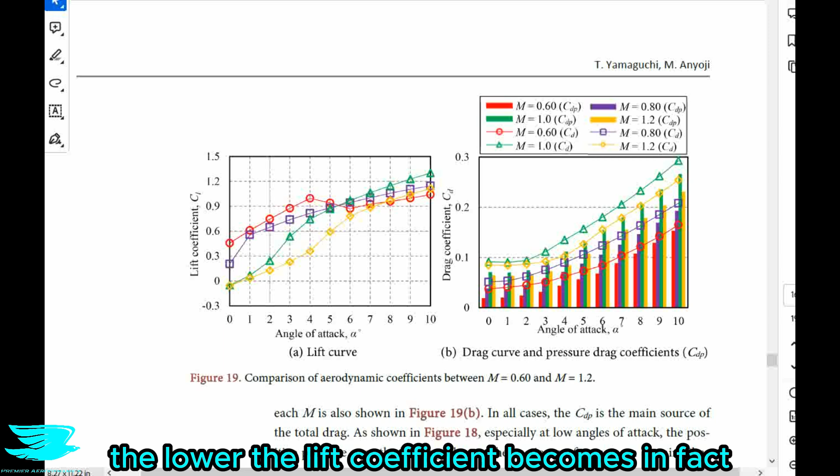Overall, the general trend is that the higher the Mach number, the lower the lift coefficient becomes. In fact, at Mach 1 and Mach 1.2 at 0 degrees, the lift coefficient is slightly below 0. That is incredible considering this is a cambered airfoil and should be producing lift even at 0 degrees. It should be well above 0. So why isn't it here? Sonic and supersonic Mach numbers aren't producing any lift — it's actually producing some sort of downforce.

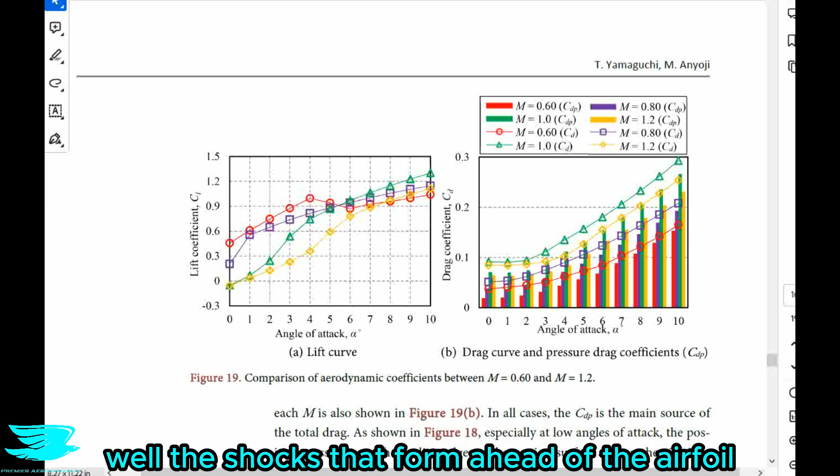Well, the shocks that form ahead of the airfoil and even at the leading edge redirect the flow, so it's not coming in at the same angle anymore. As such, the overall angle of the airfoil is now low enough to produce negative lift.

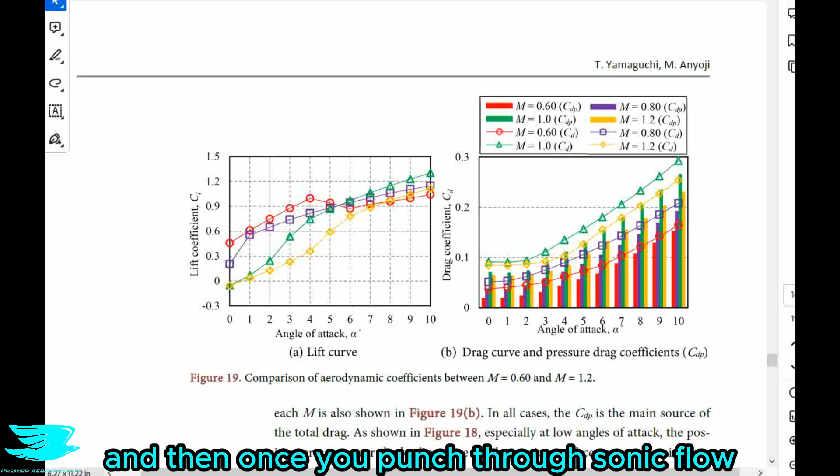So what about the drag coefficient? In figure 19b, we see the quintessential sonic plot. As we approach sonic speeds, the drag coefficient increases more and more, as we see with this green line here, getting the highest. Then once you punch through sonic flow and it becomes supersonic, the drag coefficient drops, as we see with the yellow line, slightly below the green line.

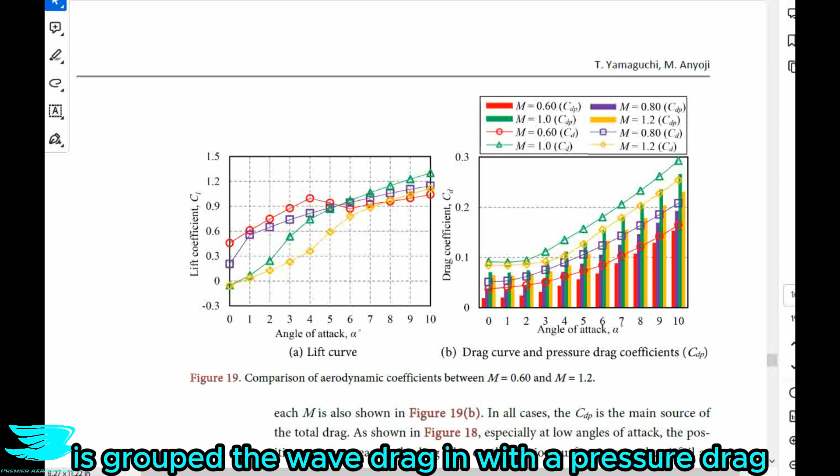The researchers say the main component of drag here, especially as you approach sonic speeds, is the pressure drag. I'm not really a big fan of what they said — they've grouped the wave drag in with the pressure drag, which I guess you could do if you think of them as just pressure on the airfoil. But by grouping them together this way, you make it harder to understand how to dissect the different components of drag. What is actually happening is that the shock waves greatly increase the pressure upstream, which increases drag, and that agrees with literature from the past 70 years.

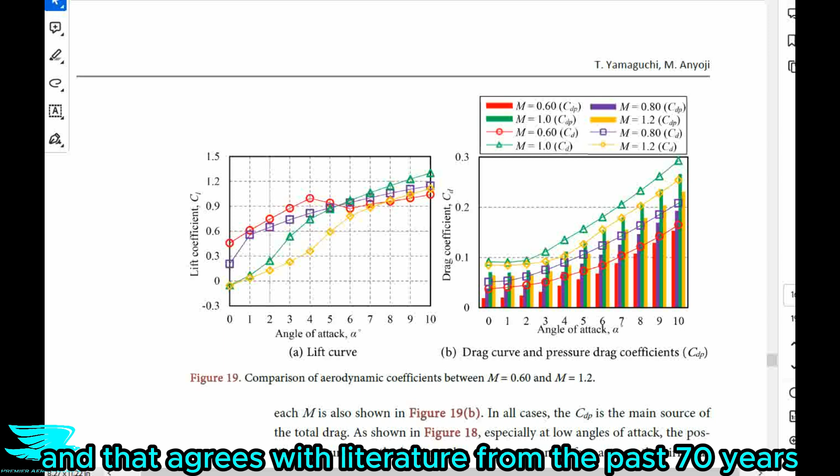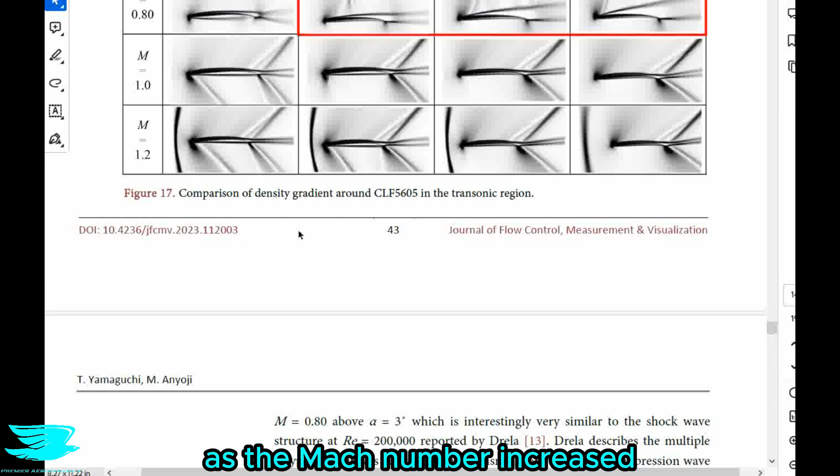And with that, we come to the end of this podcast. I was actually quite surprised at how much the Mach number affected the lift coefficient at varied angles of attack. I also really liked their breakdown of the drag coefficient into the pressure drag coefficient too — that was a nice addition we don't usually see. And it was really cool seeing the shockwave progression over the airfoil as the Mach number increased and as angle of attack increased as well, these figures here.